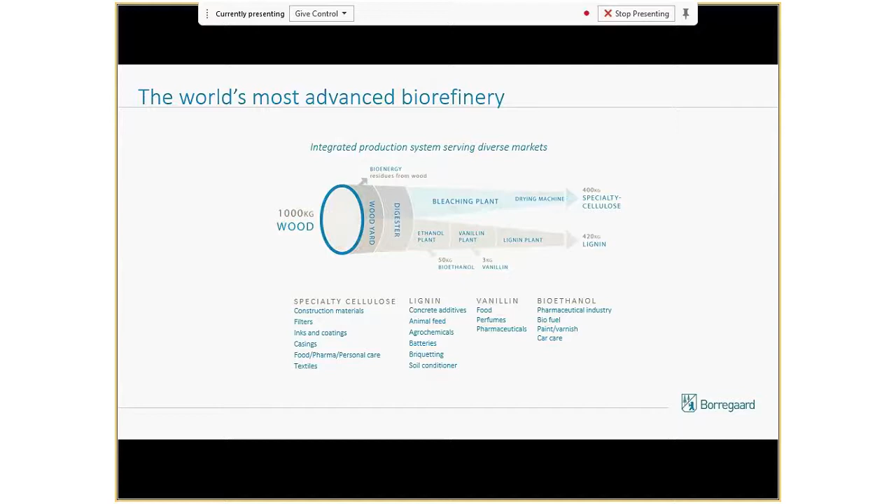So I'm going to jump into what I think are some of the key differentiators of our product versus cement or bitumen when it's used for full depth reclamation.

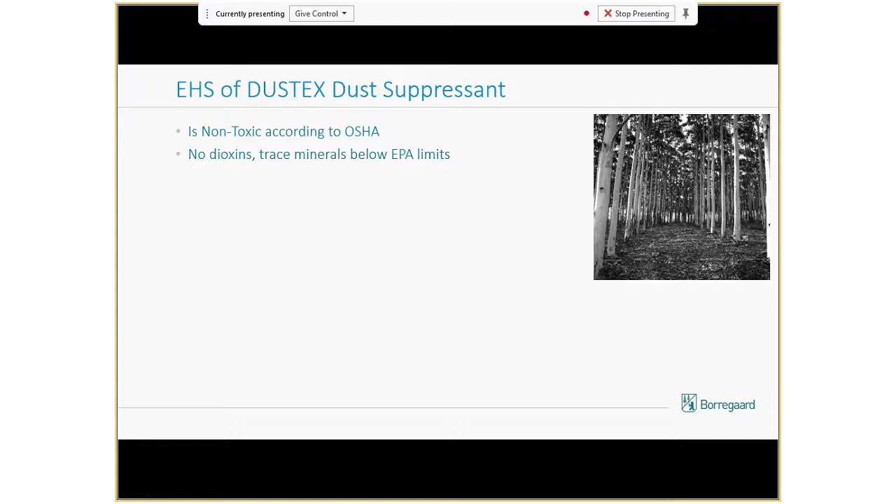And the key part here is that when you look at environmental health and safety, our products are non-toxic, they contain no dioxins, and the trace minerals are below EPA limits.

It's not harmful to aquatic species. It's not harmful to terrestrial species. It's not a skin irritant, so it's not harmful to humans. It's classified as not dangerous according to the Global Harmonized System, which is your safety data sheets nowadays. And it's REACH exempt, which is a European designation, but it's well known here in the US as well.

I'll take a moment to say that there's going to be a packet of information that will be included or available after this presentation, and some of that information will include more details related to this environmental health and safety, so you'll have more details as to what the limits are in these particular tests.

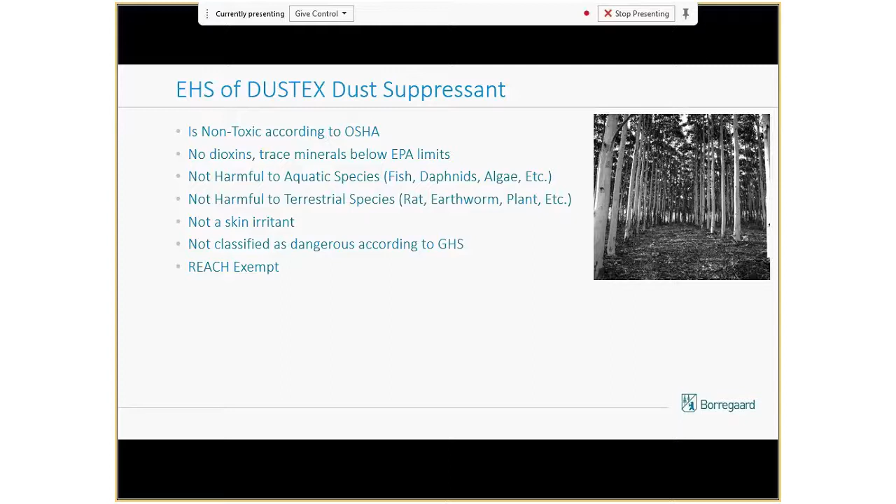Then the other unique aspect of our product is we deem it a sustainable product. And when we talk sustainability at Borregaard, we talk about 3 Ps: product, production, and people. In terms of product, of course, you want a product that is renewable and sustainable.

As I showed earlier with that biorefinery concept, we're taking biomass, wood, and using that for our products. That's very sustainable. Further, 92% of the raw materials we use are produced in a sustainable manner as well, and they're certified as such. So the forests are harvested and planted in a sustainable way.

Then when you talk about sustainability, another thing comes up called life cycle analysis. What that means is you take the product from the beginning to the end, how it's made until how it's used and everything in between, and you evaluate the impacts that product has on the environment. Then you compare that to other alternatives that could be used, and you see what's more sustainable than others.

And our product is positive in a lot of these life cycle analyses. I will have more data on that coming up shortly.

In terms of production, not only do you want a sustainable product, but you want to produce it in the most sustainable way you can. So we reduce our CO2 emissions, we reduce our energy to produce the same amount of material, and reduce our SO2 emissions. So we're striving to produce the product as sustainable as possible.

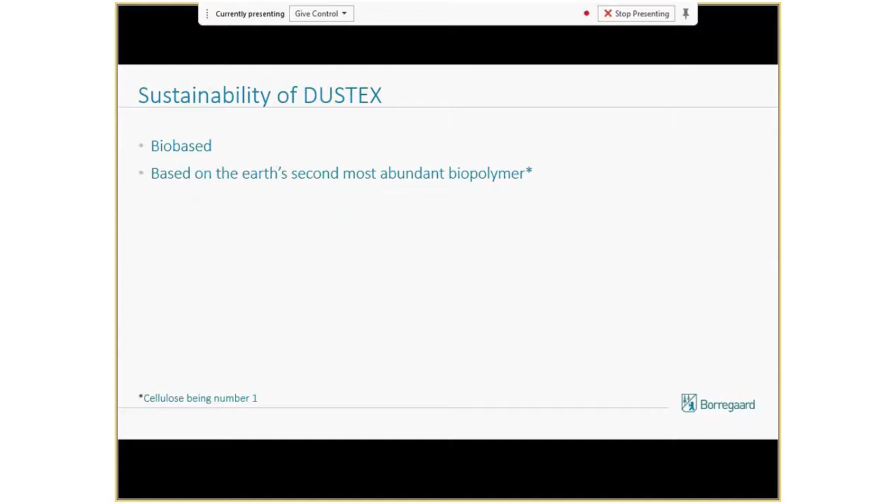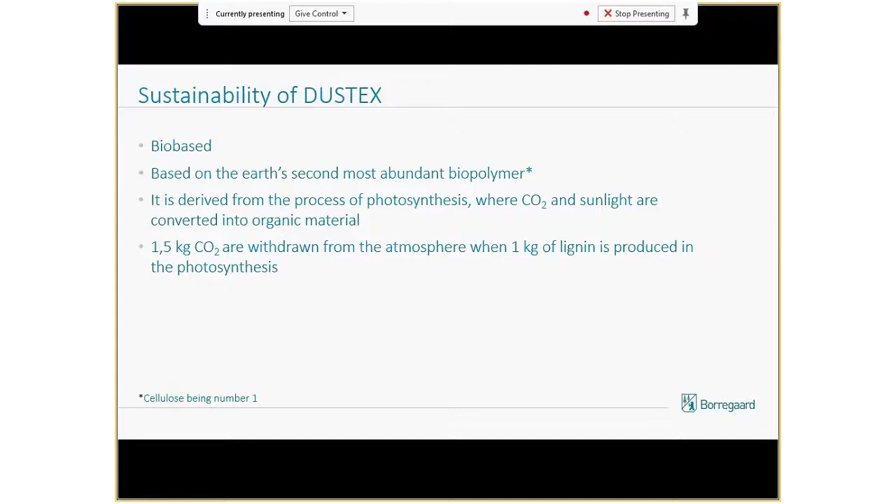It's derived from photosynthesis, so obviously you're pulling CO2 to make this product in the end. For every kilogram of lignin, which is Dustex, there's 1.5 kilograms of CO2 pulled from the atmosphere. It's not derived from food sources, so we're not competing against the population for raw material.

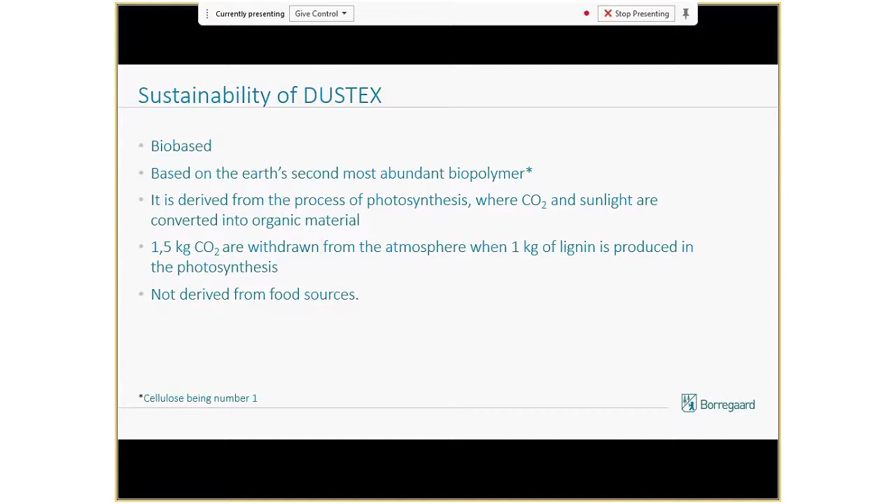I mentioned the life cycle analysis early on. What we did is we got a consultant to do a life cycle analysis of our product as it's used in road-based stabilization and compared it to bitumen, which would be asphalt, and also cement. And the way we put this together, we also accounted for the dosage that would go into that process.

When you do a life cycle analysis, in this case we looked at 5 different aspects: climate change, ozone layer depletion, photochemical oxidation, acidification, and eutrophication. Each of those has different units of measure. So to compare them accurately in a chart like this, we basically benchmarked the worst case offender as 100%, and rated the other two products relative to that. Does that make sense? Okay.

So in climate change, cement was the worst offender, and bitumen's not terrible, but lignin is far better. In ozone layer depletion, bitumen is the worst offender, and cement and lignin are pretty low. Photochemical oxidation had a very similar result to ozone layer depletion. For acidification, both cement and bitumen are very high, and the lignin, or Dustex, is very low. The only category where we come in high is eutrophication, and that relates to the fact that our product's organic, and as it breaks down, it'll actually take up some oxygen out of the atmosphere - that's called eutrophication.

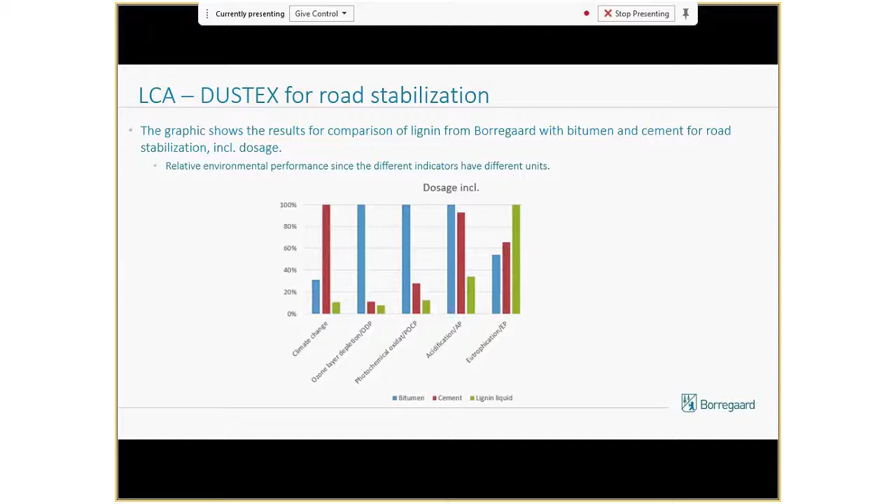Well, if you want, it more or less says that if you have a project where you're going to use Dustex, we recommend as MnDOT that you use our special provision, so you don't make it up yourself. We already have it, so you just use the special provision we have, nothing more to make up. Okay, more or less so. All right, thanks.

All right, so I first started out with our company and then how our product differentiates from bitumen and cement, which I believe is the sustainability, environmental side of things.

So now I'm just going to tell you a little bit more what the product really is and then how and what brought us closer to today for this presentation.

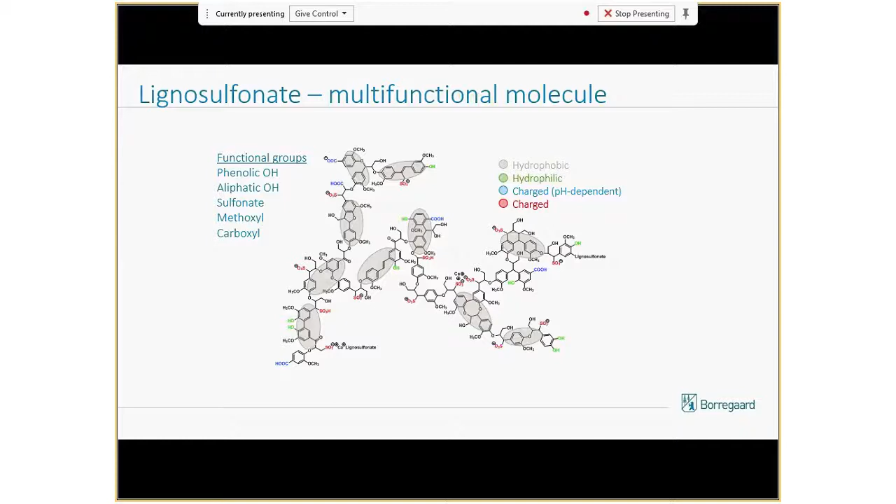And when you use it for road stabilization, you start out with your road base and all the particles intermixed into that. You put in DUSTEX, and now it's intermixed with the road base, and it starts to coat those soil particles.

And because of the unique properties of DUSTEX, it lubricates it. And now you come in with a compaction process, and you flatten that material out, densifies it, and then once it's densified and begins to dry, now the DUSTEX becomes a glue. It starts holding all that stuff together. So lubricates it, compacts it, glues it together. You end up with a stronger, better road structure.

On a different level, if you look at the molecules, soil particle, the DUSTEX coating it, and they're all bonding together. Basically, it's a chemical and physical binding action, due to strong intermolecular forces and adhesive forces. That's the extent of the chemistry I was going to share with you today.

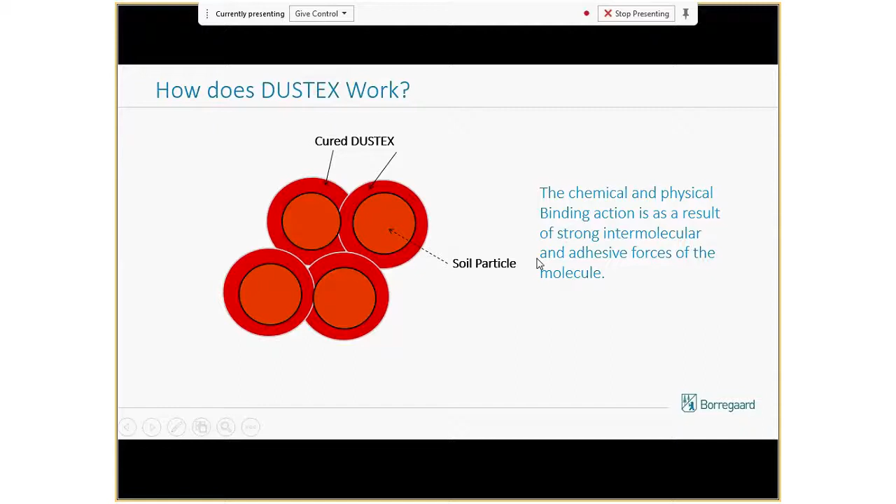So, thank you. You're welcome. Yeah.

All right. So, is this really something new? And I would say it's not completely. Back in 1912, a U.S. patent came out that showed the use of sulfite liquors, which is the raw material that's used to make DUSTEX, patented for dust control.

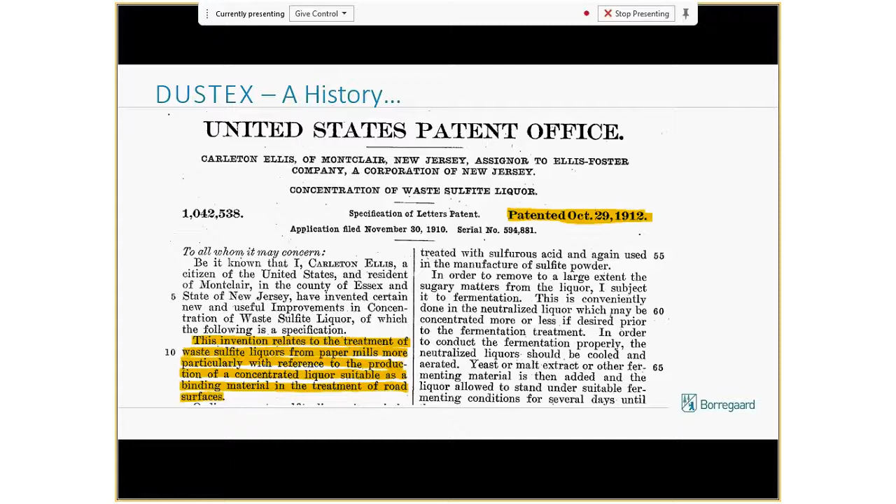All right, now that's not full depth reclamation, or that's not stabilization. But what happened was they started using this product for dust control and found out later that the road structures were improved. So then they started looking into this a little further, and in 1922, another patent came out, and this does specifically relate to full depth reclamation. It's the use of sulfite liquors, which is the raw material we use for DUSTEX, as a binding agent for asphaltic materials mixed in with road base, full depth reclamation.

So that brings me to the question, well, how come we're not using this more now? My working theory is that we as a company are the major producers of this material, and we looked at a lot of other applications to sell our product to that we perceived as higher value. That changed the availability of this material. So I think it's an availability thing that affected the use of our material in this particular application.

And then over time, things like bitumen or asphalt emulsion or cement end up filling the void, and that became the standard for this process.

So now, jumping back to one of my first slides that said here's all this new volume we have coming in, we have this Florida plant that produces 150,000 metric tons dry solids of material. That changes the game, I believe, and this is why we're here today to talk about it a little bit more.

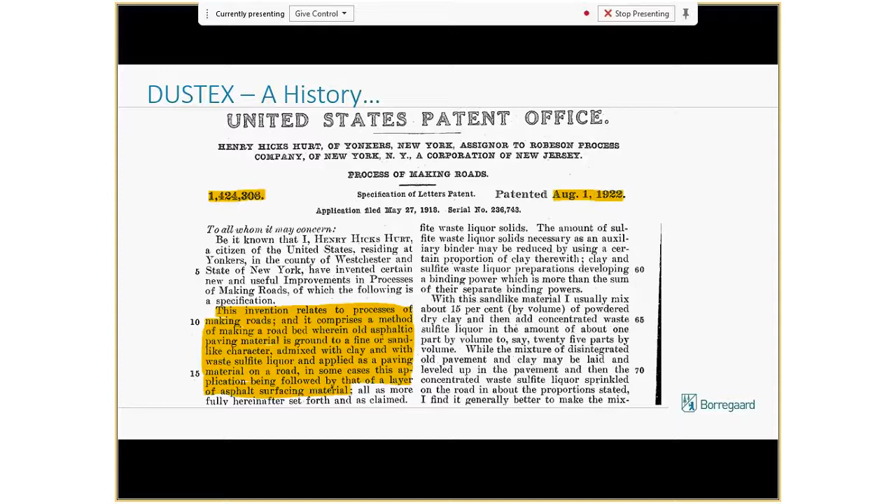All right, and that's also been used readily for soil stabilization in Norway. And this kind of led us to get this special provision from MnDOT, based on this data and this study done by the Norwegian Road Authority, where they stabilized 5 roads with DUSTEX in 2002 and 2006, and then went back in 2017 and reevaluated those roads to determine how they're holding up.

Can I ask a question? So when you say soil stabilization, the picture kind of looks like base. Are we talking about base material, rocky material, or actually the subgrade, the soil material? We're talking the base material. As opposed to full depth reclamation. It's not full depth reclamation. This is just to say it stabilizes road base.

Now, part 3 of this slide is that those roads that were studied here were produced with what they considered subpar materials. They would not build these roads with the current road base there and expect the road to last very long. So they knew they had to add something, and they went with DUSTEX to give it a shot and see how it performed. If these roads were built without DUSTEX, they would fall well under the standard that they outline in their N200 standard in Norway.

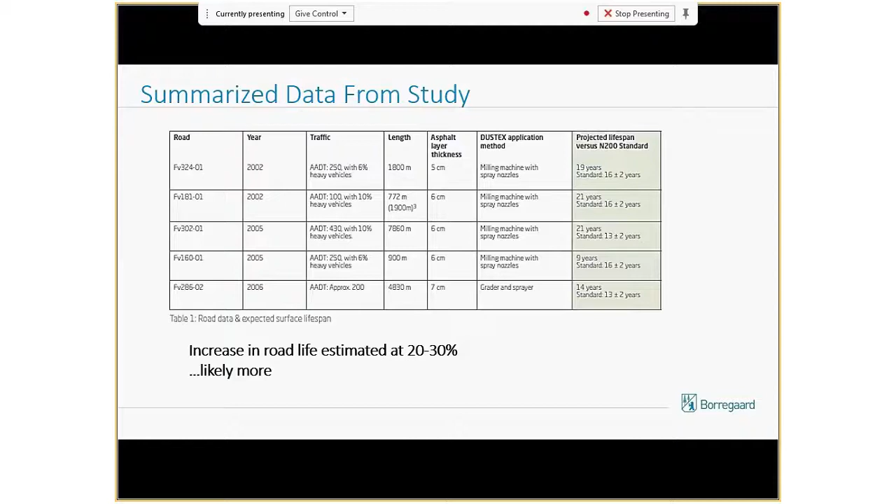Okay, Steve, good point, thanks. All right, with my limited knowledge — again, I'm a chemist trying to speak in engineer terms — Terry was able to give me a couple values to evaluate against.

He gave me the cost per square yard for asphalt per inch if you did a full depth reclamation process, and so on. So if you did a full depth reclamation and did nothing else but milled it and put asphalt on top, it would cost about $15.50 by my math.

Just one other point I made a few minutes ago: this only looks at the first bit of bituminous you put on it. Right, so I've fixed what's underneath the bituminous. But the second time you put bituminous on it, if your product lasts that long — and I'm assuming hopefully it lasts years — then that bituminous or surface would also have a lengthening service life, beyond that, because you're stacking it back up on good stuff. What's under the bituminous, we're thinking 50, 100, 200 years.

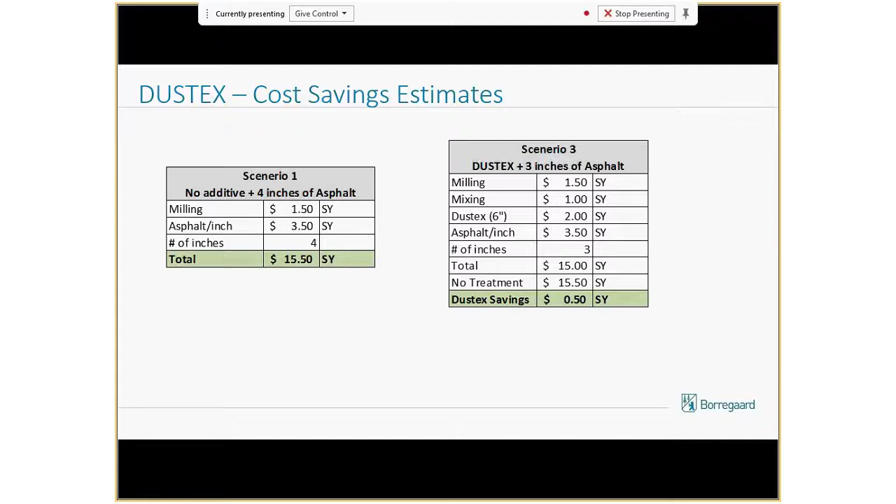And then one other scenario I put together was between 3 and 4. Here's the same scenario I described earlier, but then let's compare it to cement or oil stabilized full depth reclamation type road. And here we see that the cost savings would be $3 per square yard over cement stabilized road base, again taking out 1 inch of asphalt on top of that. I don't know how these products will compare in the field exactly, but it's indication that there is some potential here.

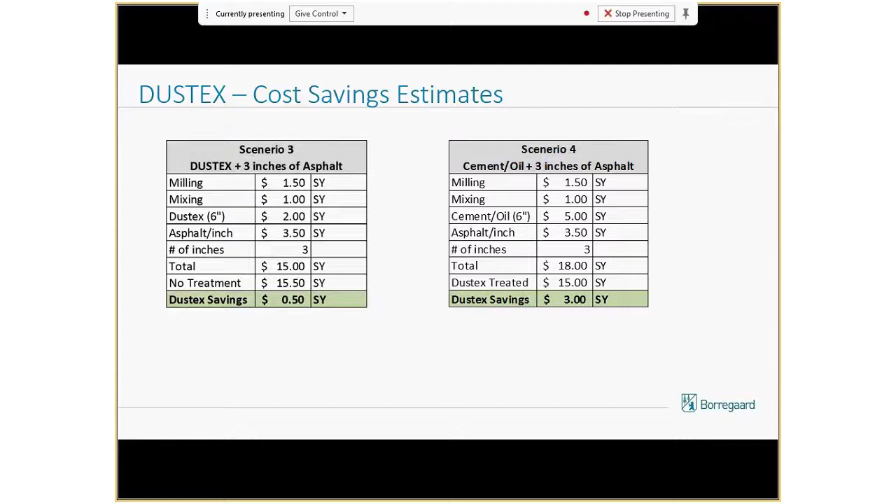So now Lloyd's going to talk about how he applies it and uses it in Norway. And Lloyd, tell me when you need me to switch slides, please. Yes, I will.

You see the roads that we have here in Norway? I guess you have some similar roads over there. Normally we go like 25 centimeters deep, and we crush stones and mountain and asphalt and mix it into a total homogenized material. Mainly the roads we have in Norway are asphalt based, but now we are also going to attack gravel roads as well for the government. We work like almost all the roads are only for the government, municipalities and counties and state.

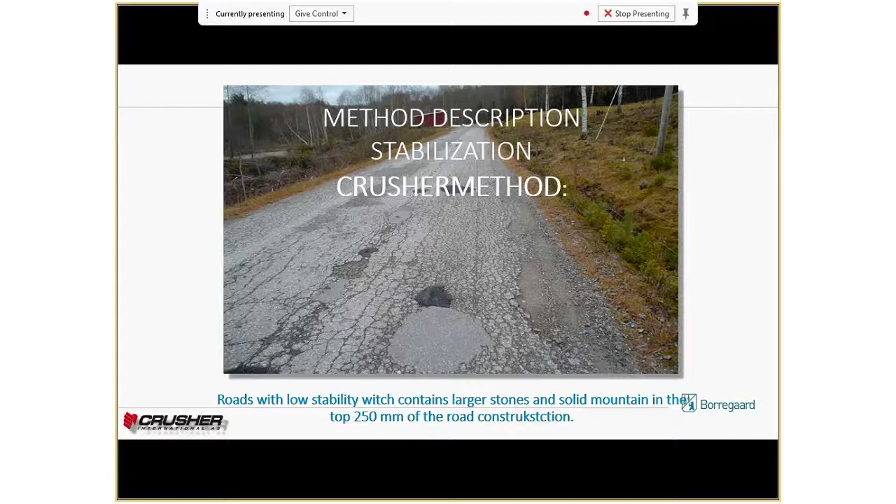So next picture, Steve. Here you see the Rocky Mountains up in Norway. We have a lot of roads that have very little material above the solid mountains, so when we come with our milling equipment we hit solid mountain all the time. That's why it's so hard to handle Norway. So next picture.

And the FDR is a very good combination with the Dustex. We use only Dustex in Norway. We have competitors who can handle bitumen, but cement is never used in Norway, neither lime, because it's too stiff. And bitumen has a problem also in Norway because of the frost heaves. It gets too stiff and it cracks, and when it cracks it sucks up water and salt, and for every winter the cracks are getting bigger and bigger, and eventually the asphalt layers in the crack itself.

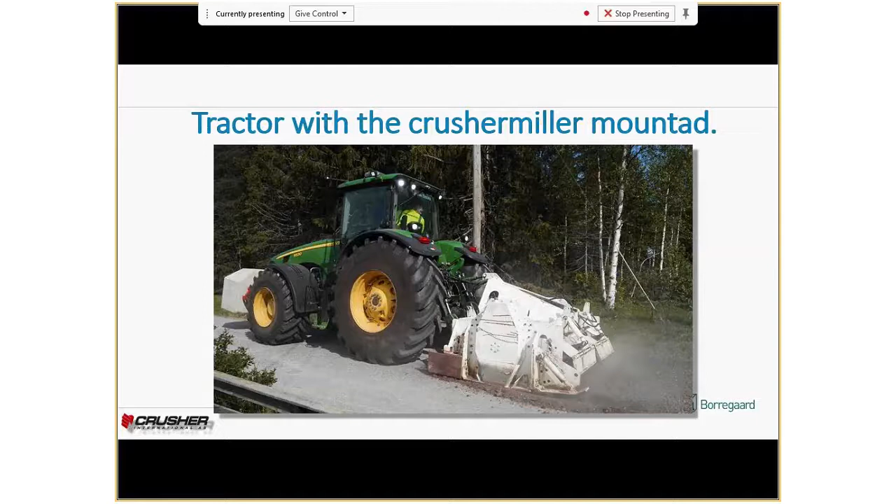Next. Here you see what we have over here. It's not exactly Sahara, it's like granite. That's the regular thing, granite and river stones, very hard material. And when they come to the real hard parts, we are the only one who can handle it, so we're thinking if we can handle Norway, we can handle the rest.

So as in our eyes, Norway is our lab, but the market is out there. So we crushed, you see the material in the bottom under the crusher, then we lift it up, big rocks, and behind it you have the gravel with 40 millimeters maximum, and then you have a very good base to stabilize.

And everybody talks about bearing capacity. Are we trying to get away from bearing capacity? We're talking about the capacity to float. If you have soil and you have clay underneath, whatever you do, you are coming and struggling to the point that you will end up asking how is the bearing capacity. That's why you have to ask do you want to have a ferry or do you want to have a bridge? A bridge is very expensive. You want to dig out all the material, again it's very expensive.

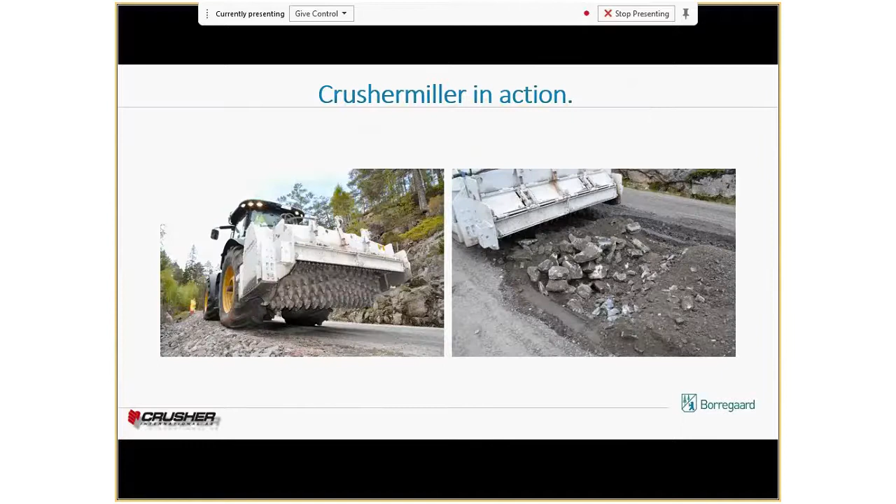Next question - maybe it shows it here. Are you milling from edge to edge, from ditch to ditch, all the way across? Yes, that's what we do.

All the way. So here again, you see up in the mountain areas, it's very hard stones and rocks and solid mountain. And then we produce like 4,000 to 5,000 square meters a day per crusher, so we have a good capacity to handle these roads, and we deliver quality all the time.

And you have to produce a material. If we can transform the material, then you don't have to transport the material. Let the material stay, and the problems go away. So keep the material where it's supposed to be. And all these rocks and stones, normally it's a problem, but if you crush the stones and rocks, then they have potential, and that's our product.

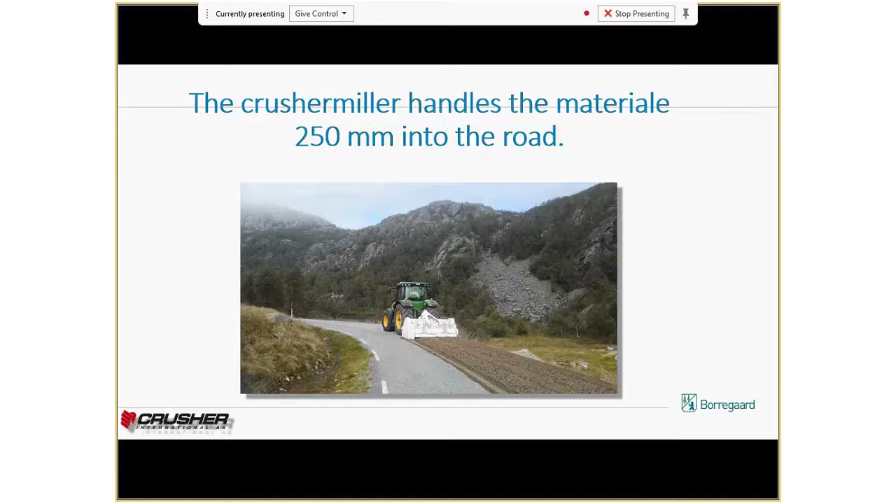Next picture. Here you see what we talked about, like you mentioned, these roads. You see behind the crusher, it's only soil - you could plant potatoes into it. In the middle of the road there was a horse track, and then finally there came a buggy wagon, and a few years later there came the T-Ford. Still, it's only 50% of the road that has gravel. The rest is flat out.

Lost him? Oh yeah. Not a phone, it's through the computer, right? Yeah, it is, through a Skype link or whatever. You type them and tell them that you lost them. Oh, but he won't see it if you want. Well, I just text him, we'll see. Yeah, text him, that's good.

So when he talks about soil problems, maybe you don't know this, but this is actual soil again, or is it? This is what the road was built on. So he's saying that those old roads just evolved over time and were never built properly in the first place.

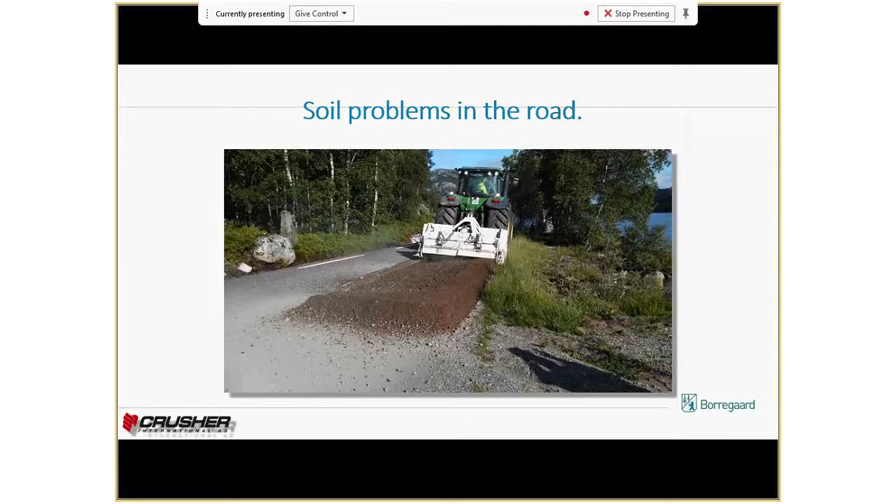Lloyd, you still there? Now finally we're back, we lost you guys. Now I'm back, okay, we lost you twice. Lost and found, okay, next picture. Lloyd, we have roughly 15 minutes.

Yep, okay. And here, when we have a lot of asphalt, we have the asphalt miller that comes ahead, and you see with the next picture.

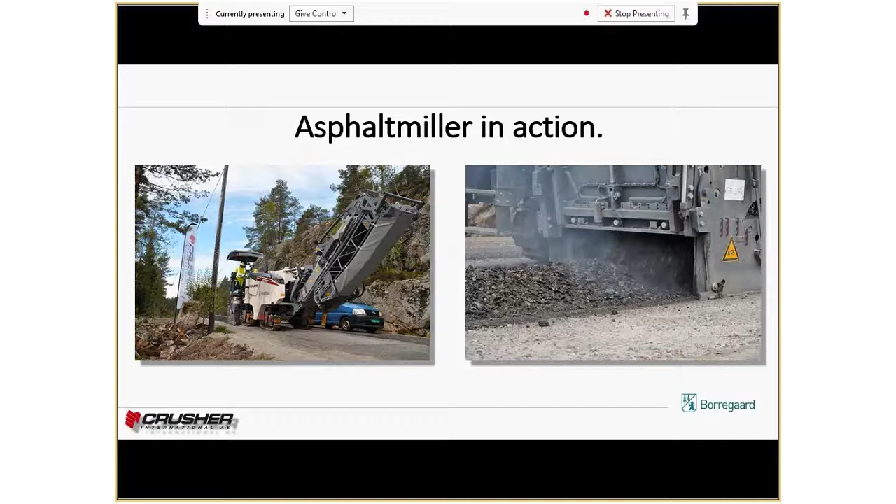Then we have the crusher comes behind, and all the asphalt is crushed and milled, and we have a good material base for stabilization, and then also the traffic can just keep on going. You don't have to close the road.

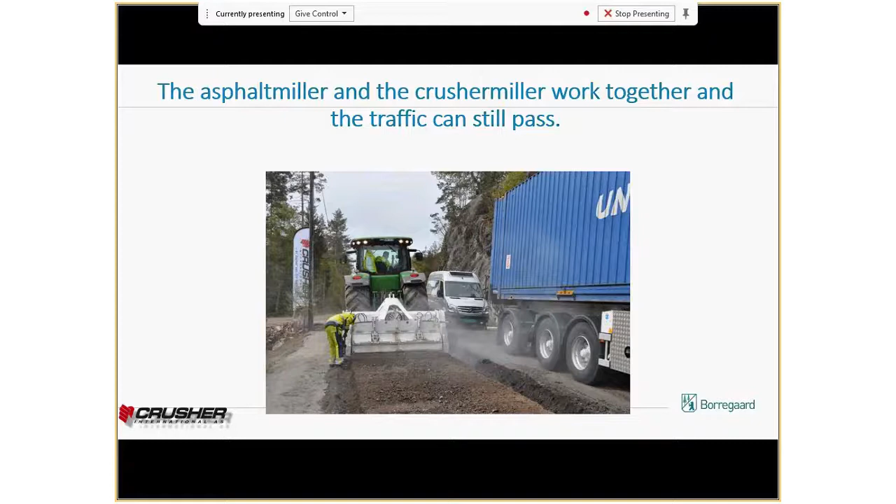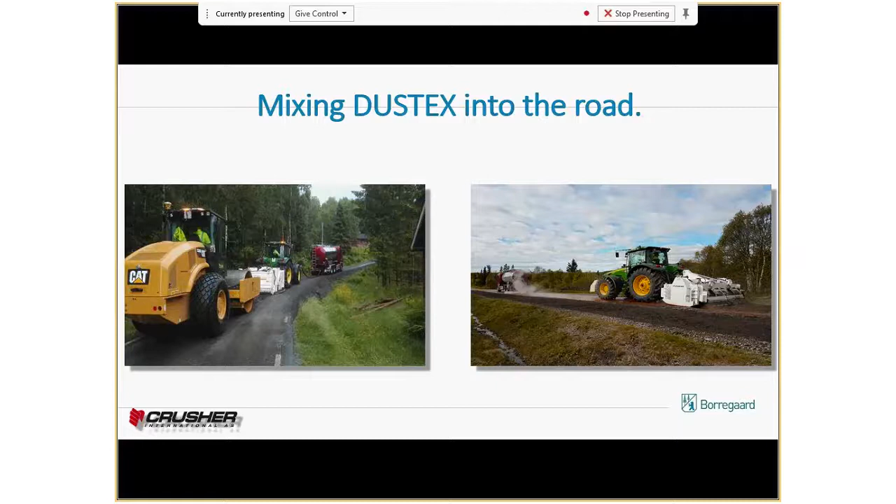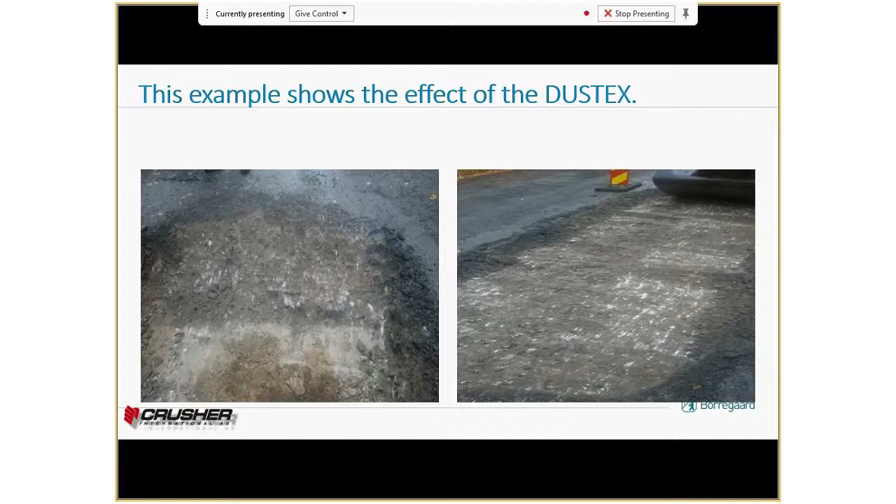It is. And here you see we had talked about the stability and the capability of bearing. This picture is taken about 2 weeks after the stabilization, and already you see how hard it gets. The excavator hardly came through it. So it's a very good base with the dust, but it must be homogenized with controlled material size.

Next picture. Here you see from the side, they dug up the road to check it out. On the picture on the right, you can see the wall, the top layer, and the dust is bound together, and you have the clay and soil underneath, the red and gray part. But the dark part is the top layer of 25 centimeters, so it's standing by itself.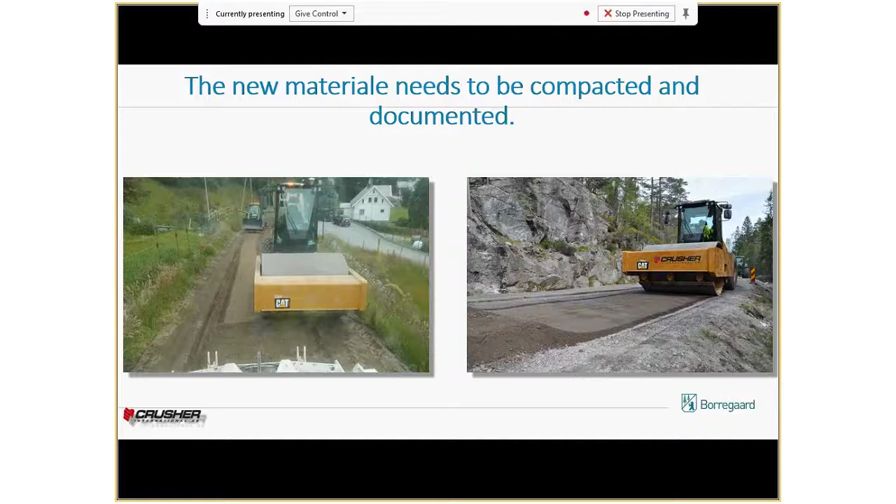Next. And then we use tractor graders on the first day. The graders come on day 2 to shape the road. In Norway we have the problem that we have more graders than we have drivers right now. It's hard to find good grader drivers, so we take care of this part ourselves. Then on day 2 they come with a big grader from Caterpillar and Volvo, for example, and they handle and shape the last few centimeters of the road. Finished.

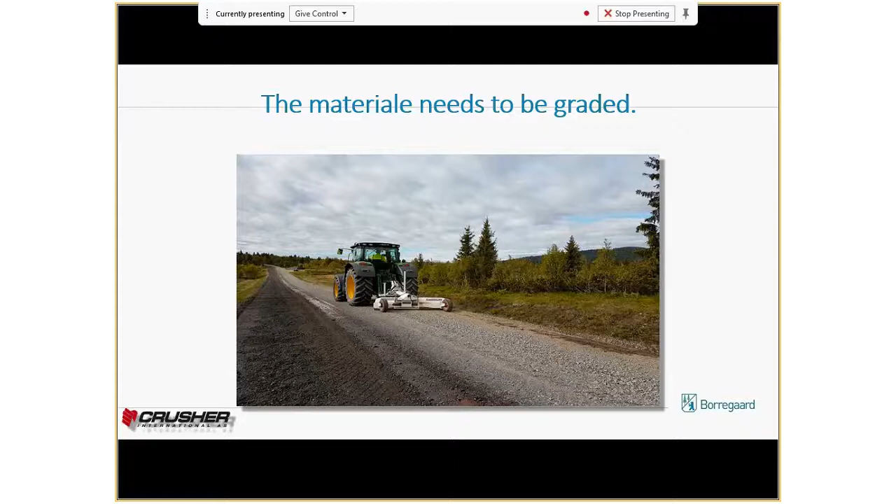Next. And we started about 2 years ago with the edge stabilization. We have compact equipment, so we compact the edge of the road down to the bottom of the ditch. By doing so, you are keeping the shoulders together and it won't pour out. About 2 years ago, we had the great flood in the south of the country, and that was about 2 weeks after stabilization. Since we had stabilized the edges, nothing got damaged during the flood. So it's a very cheap way to keep the road together with a lot of rain pouring down.

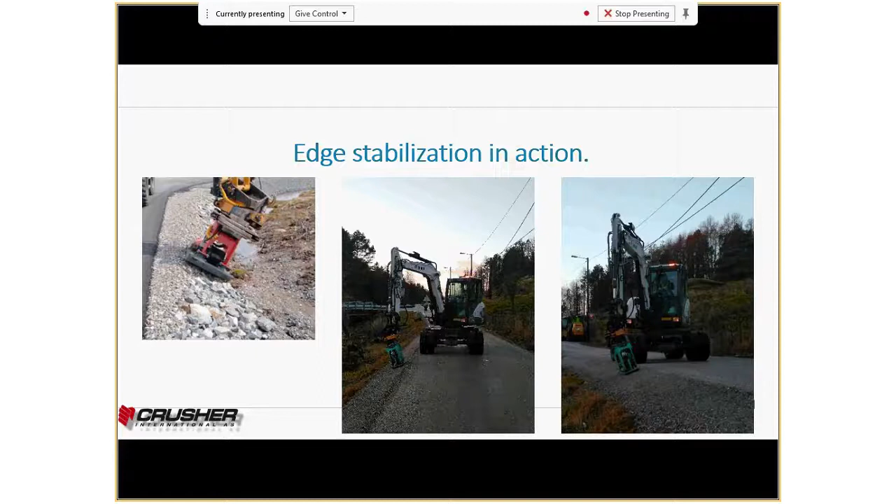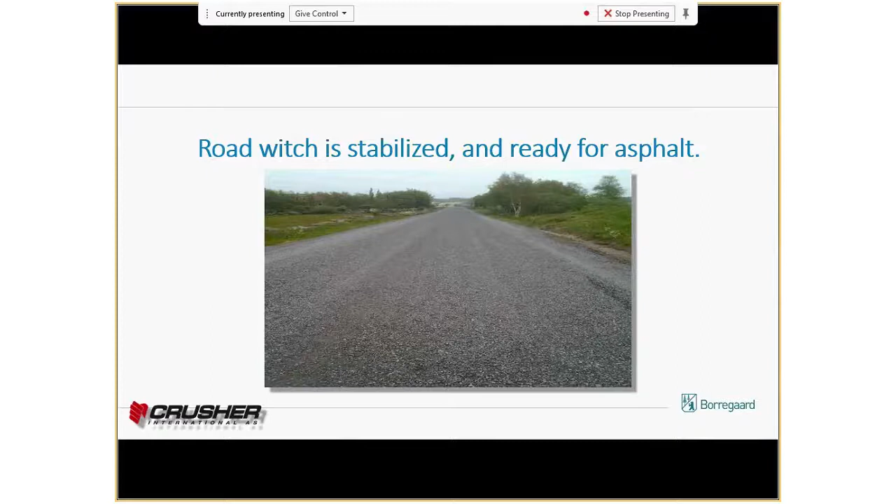Here's the road ready for asphalt. So that's how it looks, last picture. That's how you can have crushed asphalt on top, and we can also bring in crushed concrete and crushed asphalt and mix it in with the road, and you can get away all the piles of crushed material that's laying around, bring it into the road. You can have a controlled amount of material they add into it, and that works very well with the Dust-X.

I think it's part of our documentation, so what's the minimum? It probably depends on how much rain falls between when you apply the product and when you put down the asphalt. Is that correct, Steve? So how long do you want it open? 2 to 6 weeks, right? We put a 2 week minimum in ours. Got it. So that'll be something to think about. You don't want this project let for completion where you don't figure this timeline in.

One of the things we'd like to explore is, okay, this stuff cures over, let's say, 21 days. What happens if after a week you get that base built up enough to go in and asphalt it? What happens over time underneath the asphalt layer? It gets stronger, but we just have to meet some minimum strength so we can pave it.

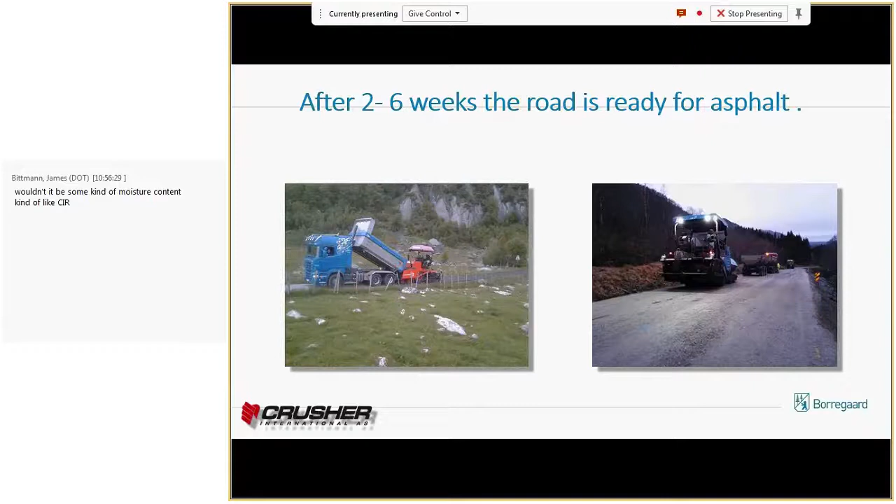I still would want to have, if I was a district using the product, the flexibility, right? So I probably wouldn't use your product for a job with an end date of October 15th. I'd want an end date of September 5th or September 1st to give me the flexibility to extend this thing out a little bit, in case we have a summer like this year, which has been very rainy. So the grader gets on like day 2. Is there a limit, like by day 4, depending on weather conditions, where the blade can't work it anymore?

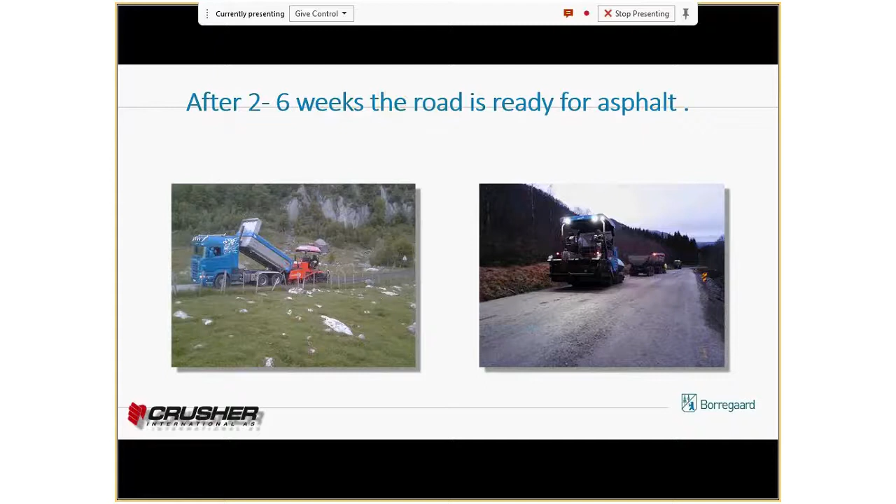Do you hear me, guys? Yep. Any other questions related to the application process of it?

One simple question, Lloyd: if you have a very hot day like we had this weekend, when you're mixing it, do you have to adjust the moisture, like on a CIR day, if you have temperatures above 100 F, you have to adjust the moisture? Is that something you need to do with this? I would imagine so. We specify collectively with our product that we should reach optimal moisture content, but if there's a factor that you guys normally use for hot days, then we probably have to incorporate that same thing into our product specs.

One last thing: in Norway, we use liquid for the Dust-X. What we want to do from next year is go over to powder. Normally you cannot bring in dry weather, but you can bring in dry material. So if we can add the Dust-X in a powder form, and then bring in water in the amount that's only needed, you have much more control, and you shrink down the time from mixing in the Dust-X until the asphalt should come along.

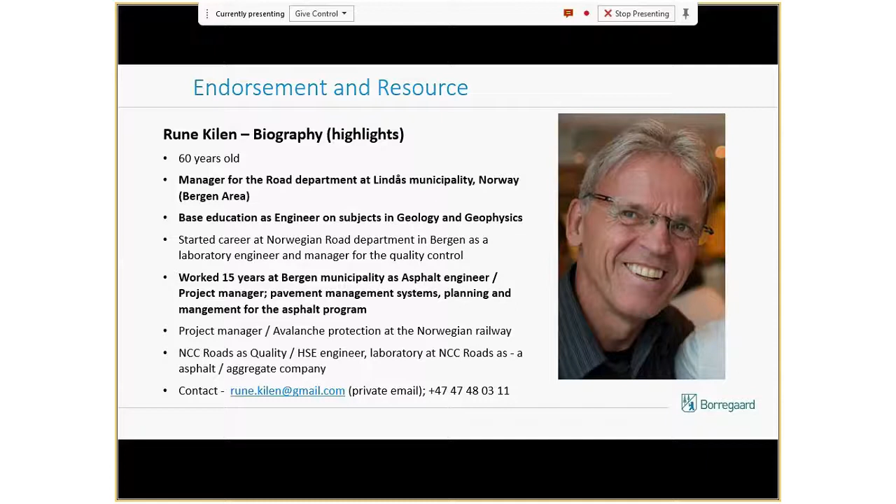Good, all right, just to quickly summarize again - we are the world's most advanced biorefinery. Sustainable, environmentally friendly product, goes back to the same points I was trying to reiterate in the beginning. Densifies and binds that road base to create that structure, and as Lloyd says, that floating structure that better distributes the weight. It's been around in some form for quite some time, and it's proven by extensive use in Norway.

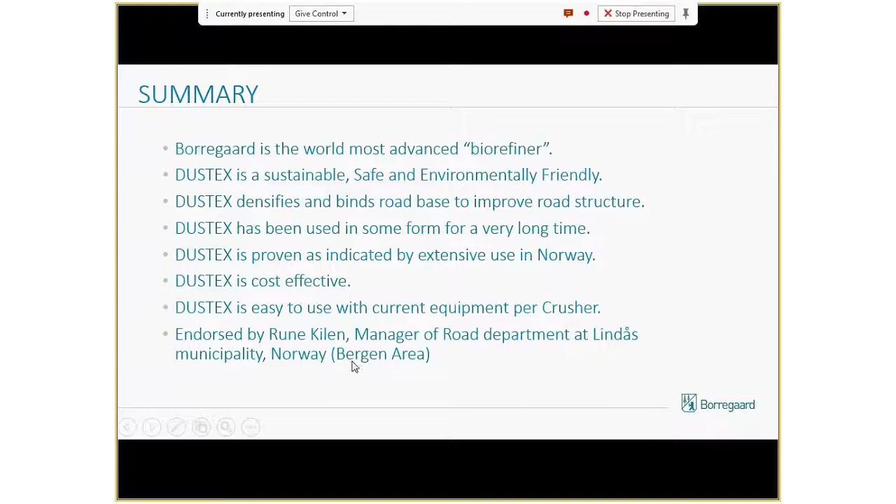I've mentioned that study, that's also included in that info packet, the Norwegian Road Authority study. But beyond that study, they're still using this stuff across Norway - it's not just in that district where Rune is working, it's being used extensively. It's cost effective, we think, and easy to use per the description Crusher outlined. And Rune endorses this product, you're welcome to ask those questions of them. So that is what we have. Sorry for the extension of time there, but appreciate your attention, and thank you everyone online as well. Thank you. Okay.